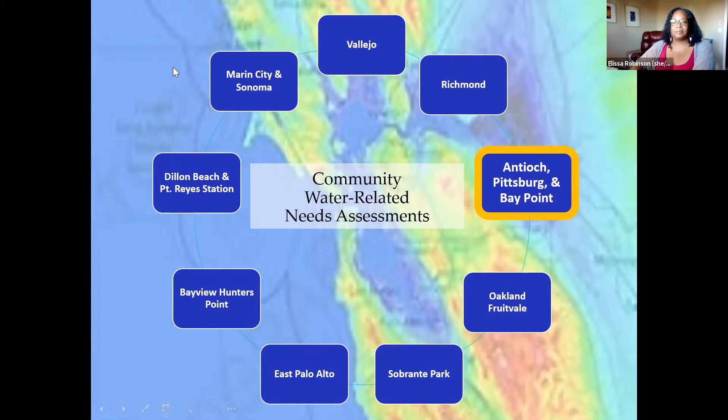While Contra Costa RCD is focusing on Bay Point, Pittsburg, and Antioch, there are other organizations doing similar work throughout California. Here in the Bay Area, we're working alongside several other organizations, and they've all conducted water needs assessments in their own communities. We are finding that our communities have a lot in common.

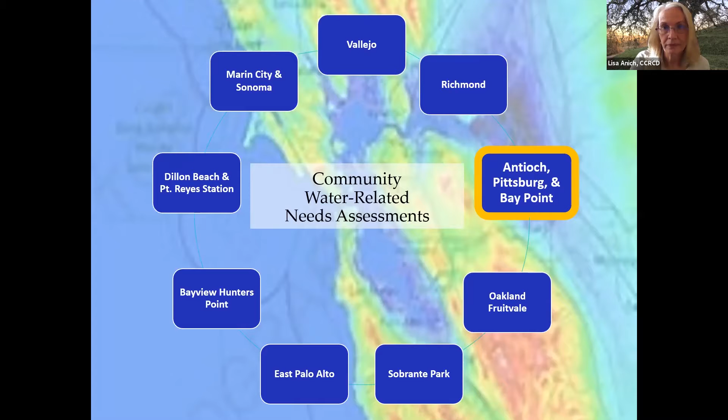So how do we go about assessing our water needs? Over the past two years, we've contacted about 300 people in Eastern Contra Costa County to gather their opinions using surveys and listening sessions. We collected surveys at several public events, and the survey was also available on our website in Spanish and English. We got about 150 community members from Bay Point, Pittsburg, and Antioch to participate in a listening session or complete a survey, with about 40 of those participants being from Bay Point.

So where we are in the project now is we are identifying and advancing the projects that meet those needs.

This is a slide that shows Bay Point and water-related needs, what we heard about most often. Many people were dissatisfied with taste of tap water, or they were uncertain about tap water safety. Those concerns about tap water taste and safety overlap with their concerns about the infrastructure that's delivering tap water to their homes. In addition, people have concerns about the plumbing within their homes and what they can do to ensure that that's safe. So that's something we heard a lot about.

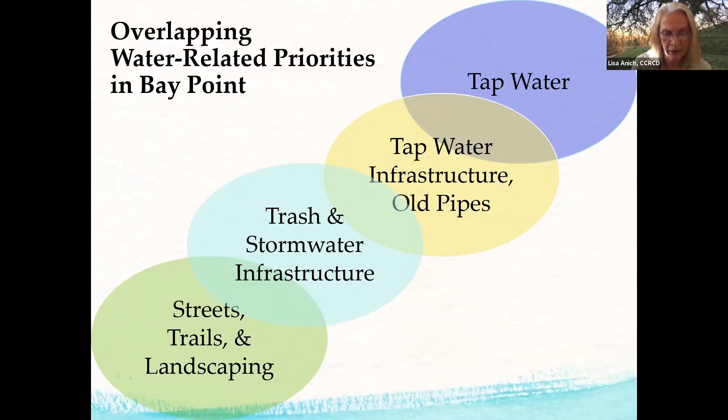We also heard a lot of complaints about litter and trash in the creeks and drainage channels that carry stormwater from streets to the Delta. Many people also told us that they value parks and walking trails in Bay Point. We heard there was really strong support for improving the appearance of the streets and other public areas by adding trees and landscaping.

What kinds of projects are we talking about to address these water needs? Tonight we're going to introduce a few of them. Please remember, this is just an introduction, we'll provide more information about these projects in the future, and we're still definitely interested in ideas for additional projects.

As we mentioned, tap water issues were a big concern, and one project that could help address those concerns will start this summer. The Prop 1 Water Bond provides some funding for a limited number of free laboratory analyses of tap water within these Bay Area communities where we and our partners are working. That includes residents of Bay Point, Pittsburg, and Antioch. So if you live in Bay Point, Pittsburg, or Antioch and you're interested in having your home tap water tested, please contact us.

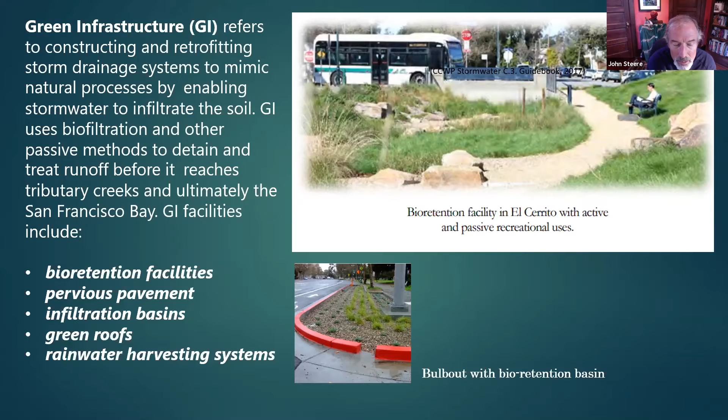The one on the right there in El Cerrito, right by the BART tracks, really looks like a park, doesn't it? What green infrastructure essentially is, is a kind of biomimicry, using engineered wetlands to detain and retain water before it goes into the soil, and then if it needs to, goes through pipes. But really the idea is to filter and treat stormwater before it goes to the creeks and the bay. Some examples identified here are bioretention basins, pervious pavement, infiltration basins, green roofs, and rainwater harvesting systems. Next slide, please.

The example you see here to the right is the kind of enrichment examples you might see along Willow Pass Road, showing potential projects in Bay Point. This is a bulb out where water comes in and goes into the engineered soil. That water is filtered and conveyed either into the groundwater, or if it's too much, it goes into a pipe after treatment. It's really working with nature, which is why we see it as an example of biomimicry.

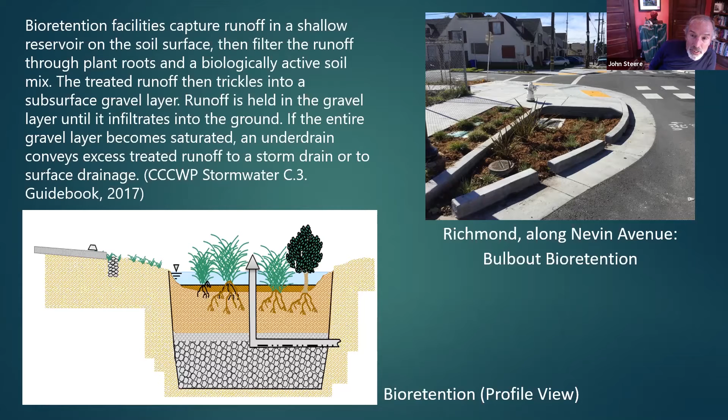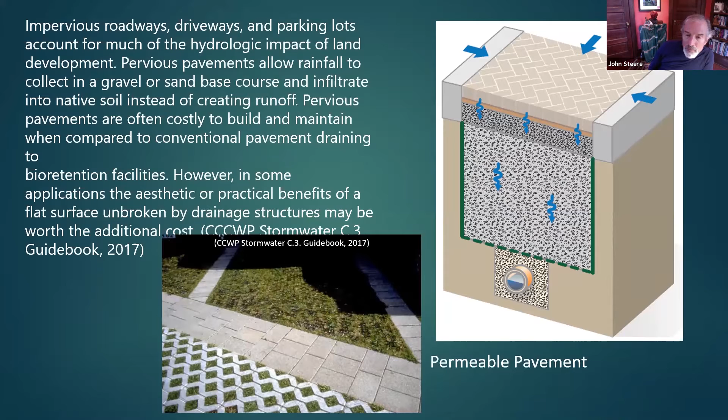Next, another example of green infrastructure that's less common but certainly applicable for a couple of projects here in Bay Point is pervious pavement or porous pavement, which allows water to seep through into the groundwater and gravels below it.

Now we're up to the potential projects identified in the green infrastructure plan for the county. About 2.5 years ago, after meeting with the community and various MACs and municipal advisory committees, the county approved a green infrastructure plan, as did all the municipalities around Contra Costa, as part of our regional permit regarding the Clean Water Act. What you see here is the development of some of these projects, which I'll go further into over the next few minutes.

What you see here are the primary examples of where green infrastructure could occur in Central Bay Point. Along Willow Pass Road, many of them are bulb outs at cross intersections with other streets like Alves Lane, Marin Avenue, Enes Avenue, and Cleland Drive, combined with street trees along the south side of the street. We'll primarily focus on the green infrastructure, but they can readily be combined in reality with something called Filterra units, where a tree serves like green infrastructure, filtering stormwater through its roots in a basin, or it could be regular street trees with a bulb out or other green infrastructure feature.

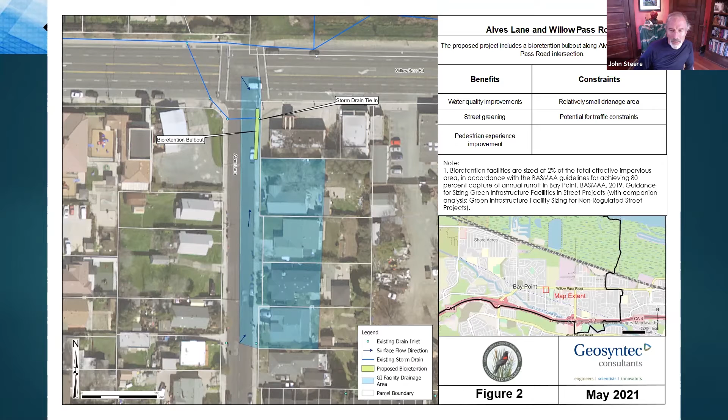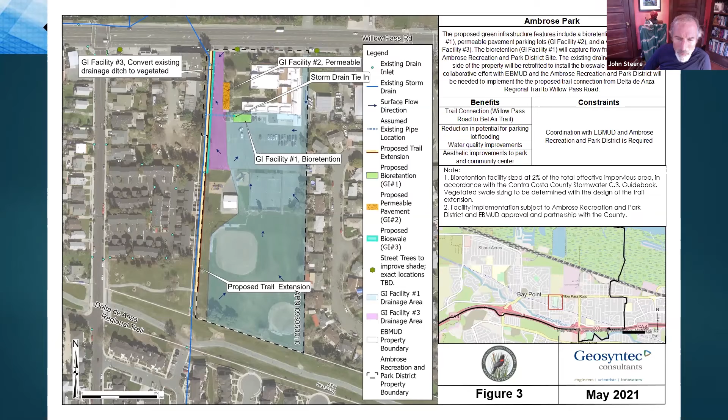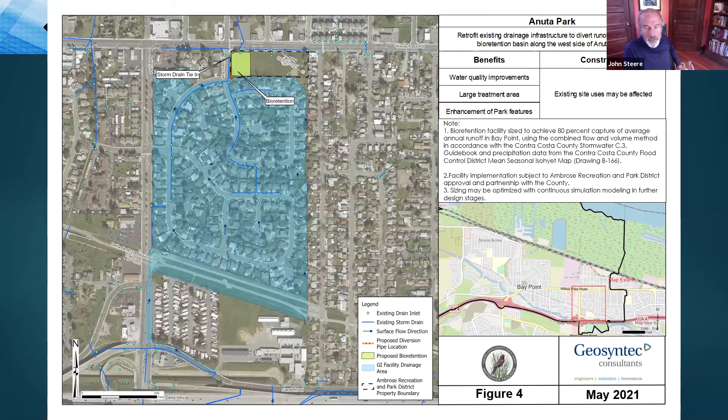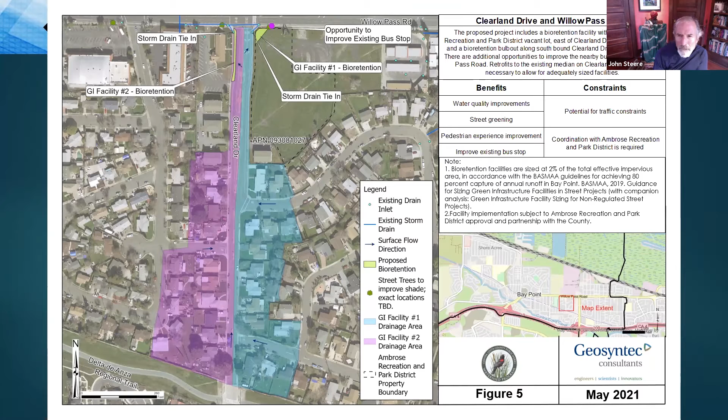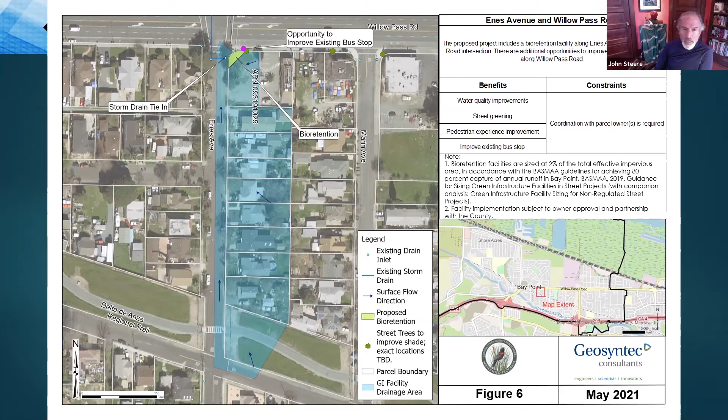So now to open it up to everyone to provide their thoughts about any of these projects and comments as to preferences. At the end of this, by the way, we'll have a poll as to preferences, as to which of these are preferred, highest ranked, and so forth, as well as the interest in urban greening.

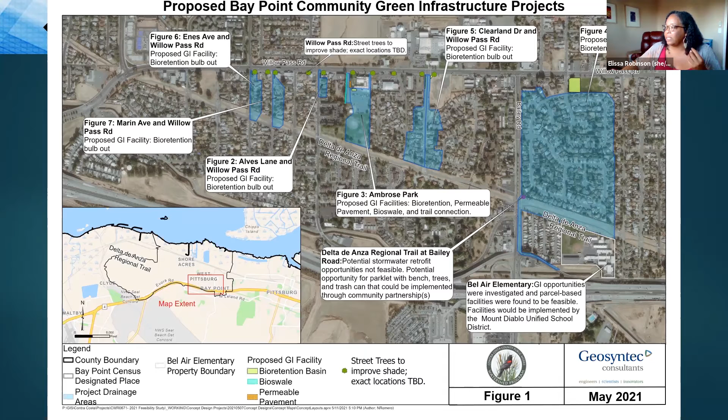When these projects are first deployed, they look fantastic. However, we are in an unincorporated region of Contra Costa. As you see now, the maintenance support for our community is lacking.

So maybe the crux of this is getting into maintenance, how these will be maintained over time.

So if I could just say one thing about that. This is very much on our minds. In fact, right now, the model we have emerging in North Richmond is working with the existing community groups or existing nonprofits. There, it's working with the Watershed Project and Urban Tilth to maintain the infrastructure that's being established there for at least a period of 10 years. Looking to the future, though, it's going to require some creativity and innovation.

I'm holding up this, if you can see my screen here, a Community Climate Resilience District feasibility study that was just finished last week by a graduate student at Cal, to basically create a green benefits district to allow the community to be engaged and involved in the maintenance of street trees and green infrastructure through a kind of community facilities district. I don't want to go into detail about how they'll be set up, because it has to be brought in by enough residents in the community saying they would like to vote for this to happen.

And that would actually allow potentially for the RCD in this case, or other nonprofits, to have their workers essentially working under contract to maintain the facilities that would be established in Bay Point. But I agree that nothing should be undertaken here without having some understanding and provision for the maintenance going forward. So John, you mentioned Urban Tilth.

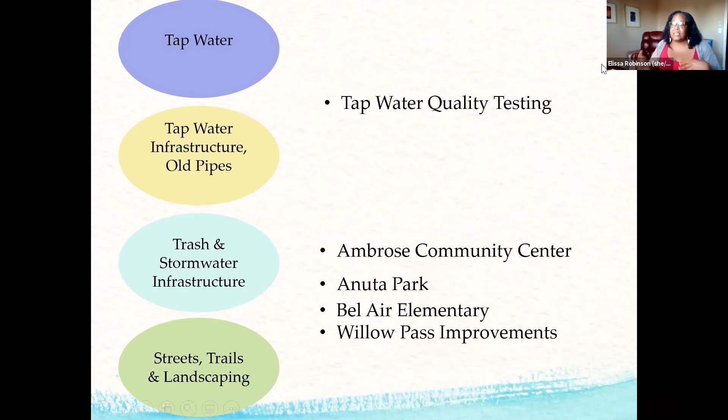So the first two, tap water infrastructure and old pipes - the tap water quality testing program, which Elissa mentioned previously, would help to identify if there are issues, where they are, whether it's in the infrastructure, the pipes leading to the house, or something else. Then the GI projects that John mentioned would actually address those other issues of trash and stormwater, and then streets, trails, and landscaping, the community improvements. I just wanted to tie that together so we're very clear on how we are addressing the issues that the community has identified.

All right, now on to the really fun stuff - please, if you don't mind, tell us what you think of the GI projects that we talked about. Jasmine, just introduce yourself in the chat, hopefully you guys have it open and can view it. Jasmine, thank you for joining us, I know that you're connected to Ambrose as well. So feel free to let me know thoughts, opinions. If there's one project that you like more than the other, or we can even rank this, we're here to collect all information that you're willing to give.

And so looking at the ones that John talked about, we broke it down into the Ambrose Park and Community Center, Anuta Park, Bel Air Elementary School, and then we clumped all of the projects along Willow Pass together as just general improvements along Willow Pass. So the floor is open, feel free to speak up, let me know what you like, and why you like it too. Peer pressure.

I could go first. Go right ahead. Yeah, might as well since I got peer pressure last time.

I really think this is a great idea and project. I'm excited whenever there's talk about protecting the environment and water conservation, especially in this area, which has a long history of pollution at our delta and surrounding areas. So thank you so much for this.